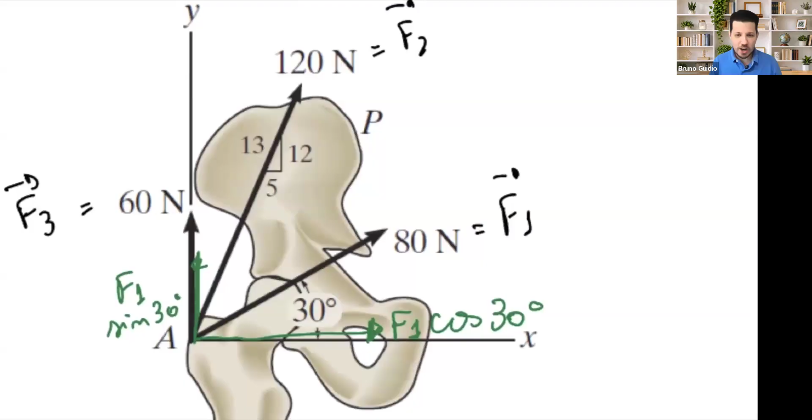With that, let's find the components of F1, F2, and F3. F1 is going to have a component right here, F1 cosine of 30, and another component, F1 sine of 30. I do expect you by now to know which is the sine and which is the cosine - this is the vector and this is the angle, between the vector and the x-axis. So this becomes the cosine, and this becomes the sine.

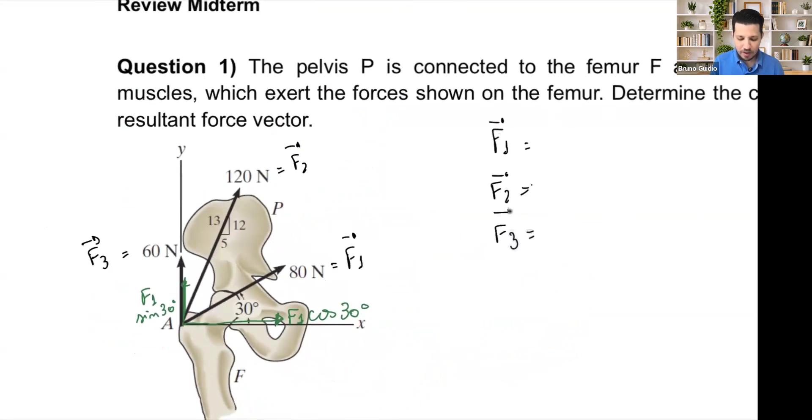What else do I need you to think about? Not for this problem, because I just put all of them as positive, but what is the direction of each vector? In this case, F1 is going to the right, so it's positive: F1 cosine 30 plus F1 sine of 30. And why plus sine of 30? Because it's going up. These are the kinds of things I want you to master.

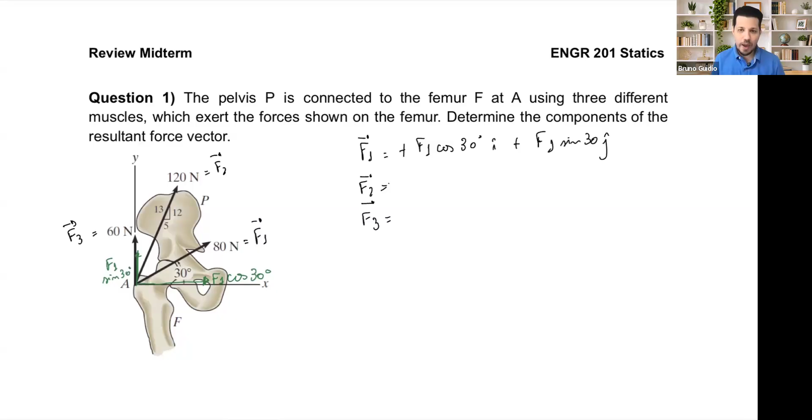Now we have this 120. Here we have two ways to solve the problem. One, we can get this triangle here, 13, 12, and 5. And we're going to find this pink angle right there.

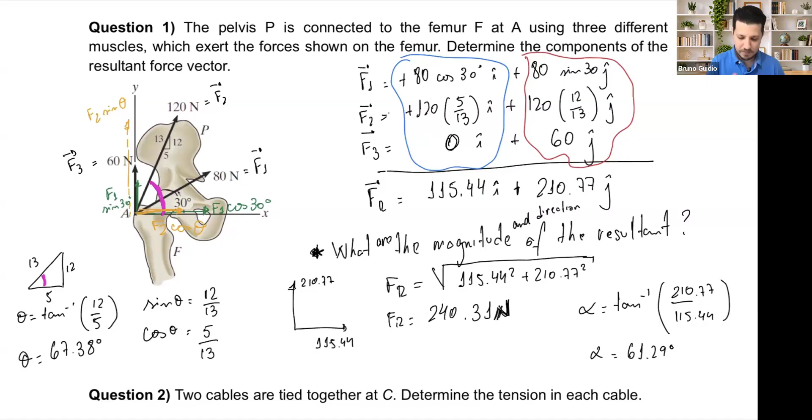Okay, going to the next problem. Question number 2 today for our review. This is an equilibrium problem of a particle. Particle equilibrium.

We have all the forces, in this case the tension in the cables, acting on the same point, and also the mass, the weight of this box.

So starting the problem, two cables are tied together at C. We need to find the tension in each cable. So pretty much what we have here, let's analyze.

Tension AC. Tension BC. What else do we have? Weight of this box. What else do we need to figure out?

Okay, my coordinates are here. What is the angle of each one of those tensions, those cables? What is the angle of each one of those cables?

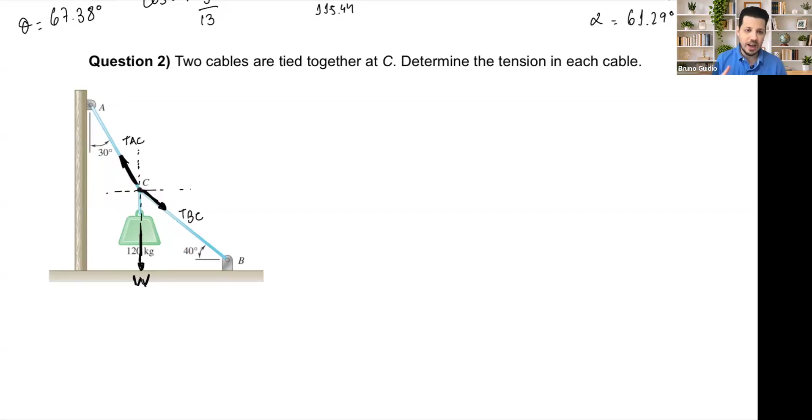I have the angles right here, 40, but what I need is the angle around here on my orange, so I know what is the direction. Let's use the trig rules, math rules that we know. For example, this is parallel, and this one also parallel.

Once I cut this, what angles are the same? See if you agree that this pink angle, 40 degrees, is going to be the same as this one, 40 degrees.

Once we cut, let's say this is 40, this is 40, this is 40, and this is 40 degrees. So my 40 degrees is right there. What about the 30 degrees? Let's say this orange force, same thing - if this is 30 degrees, this is 30 degrees.

Okay? Bruno, I don't want to think like that. Okay, let me give you another option.

Take a look at this triangle here. This is 90, this is 40. How much is this one? 50. It should be 40 plus this angle should be 90, plus 90 is 180. So this one is 50.

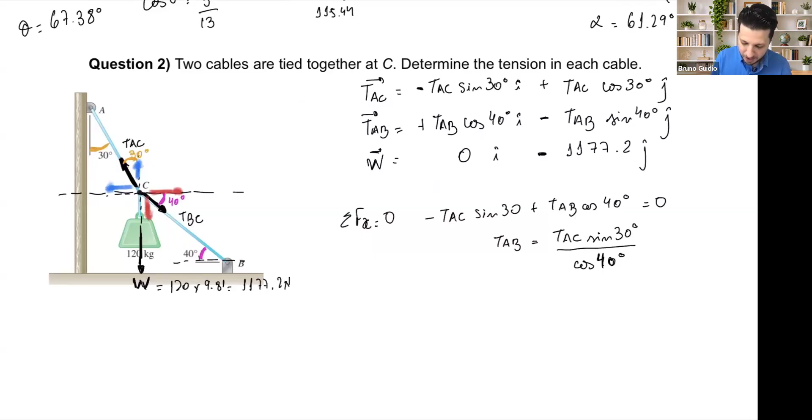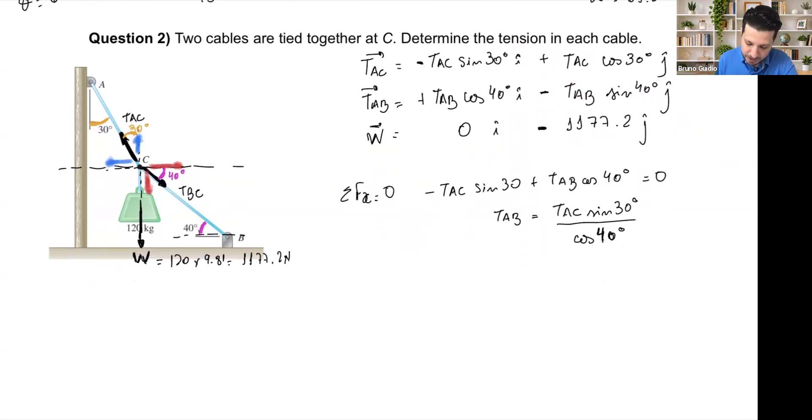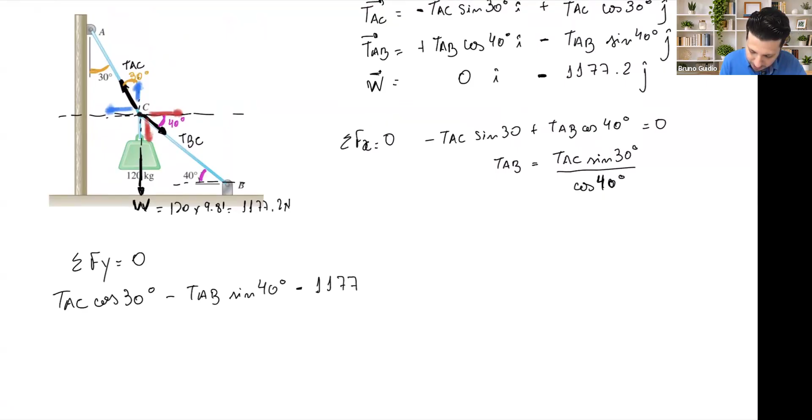Sum of the force in y. Let's do it, we have space so let me do it here. So I can also use this part. Sum of the force in y should be 0. So what I have in y is TAC cosine of 30, TAB sine of 40, and 1177.2. Okay, so this is what I have for y.

Now guys, I chose this specific problem and wrote it like this just to show you the following. Please, guys, where I have a lot of mistakes is right here on this step. I wrote TAB as a function of TAC. So TAC is still TAC cosine of 30. Now TAB will change as this one here.

However, please pay attention, TAB here, there is a negative, so I need to keep the negative. Parentheses, TAC sine 30, cosine 40, close parentheses, and then I need to bring the sine of 40, equal to 1177.2. Okay, so this step is where most of the mistakes happen.

Please pay attention, if it is negative, bring the negative. And always there is something here, okay? Bring it together, all right? This you can solve by many ways, okay? What I chose to solve here to show you is just solving one by one.

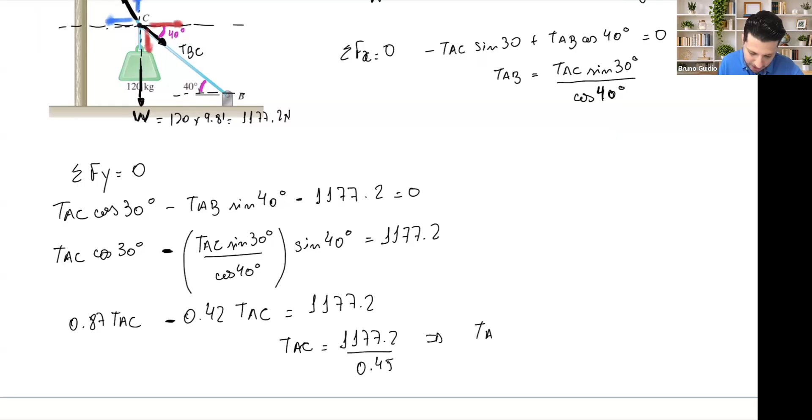In this case, I solve cosine of 30 is 0.87 TAC. Then what I'm gonna do is sine of 30 times sine of 40 divided by cosine of 40, and then negative, I should get 0.42 TAC. And then at the end, TAC is going to be that number divided by 0.45. I'll get TAC as 2,616 newtons.

Okay, and with that, of course, I'm gonna go back there. I'm gonna write TAB as this. Okay, and I hope I didn't make any mistakes.

So for this one, what I tried to do is solve individually and get the numbers just to show you that we can do like that. I think in class I put them together, cosine and then minus this one here, and solve it once, everything at once. Just to show you, you can do it like that.

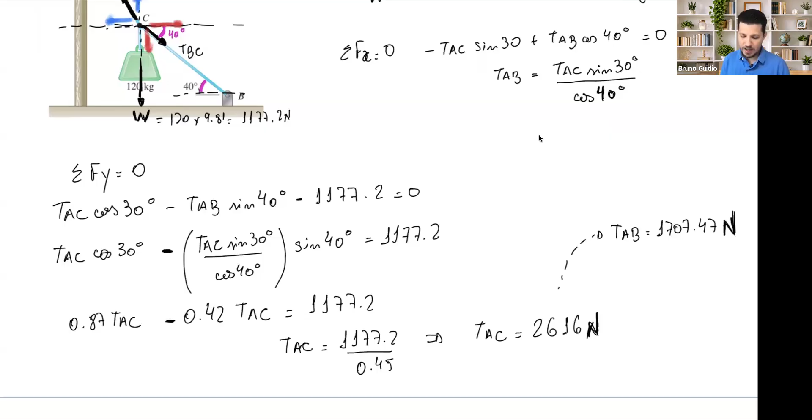Okay, let me check, 1177.2, 45. Yeah, that's it, it's correct. So this is question number 2, equilibrium in a particle. Any questions, guys? Any questions? It's all good for those who are here.

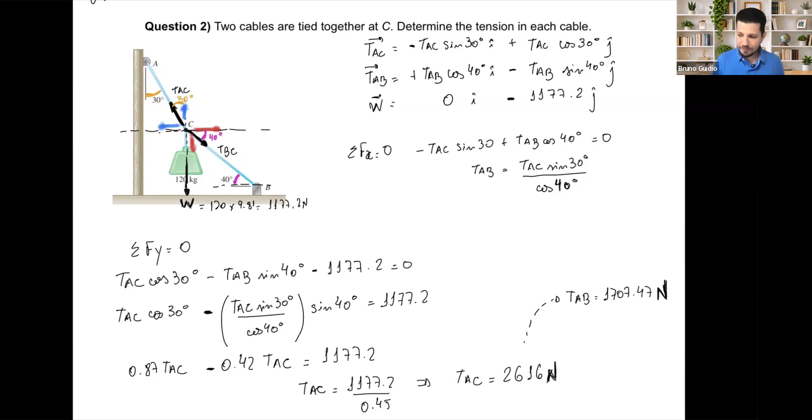Okay, going to third question. Third question. Simple one here, for this one, just for us to practice, find moment. Let's find a moment about A. And I don't know why we have this part here, so let me just delete. Let's consider like up to here. All right, so first thing that we need to do, components of that force.

Eighty cosine 25, sine 25, see if you agree. All right. Let's see what's going to cause moment. Sum of the moments, how much is it? Okay, so this is just to find the moment. I'm not saying moment should be 0, this is not equilibrium equation. I'm just saying find the moment.

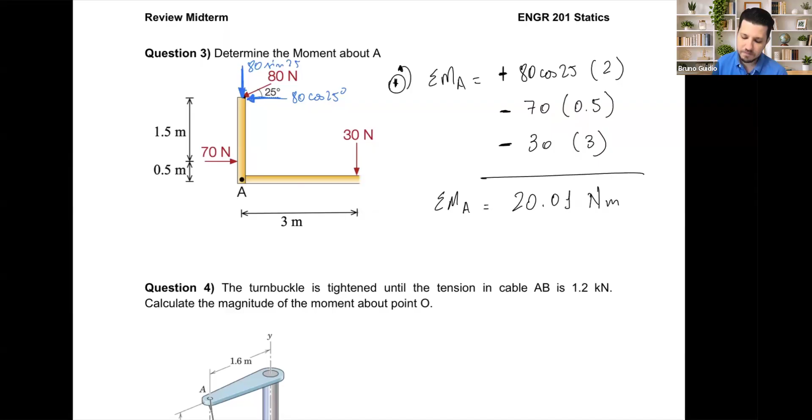So again, vectors, sum of the forces. Here we have 2D equilibrium of a particle, and then we introduce moment in 2 dimensions, and then here comes the moment in 3 dimensions.

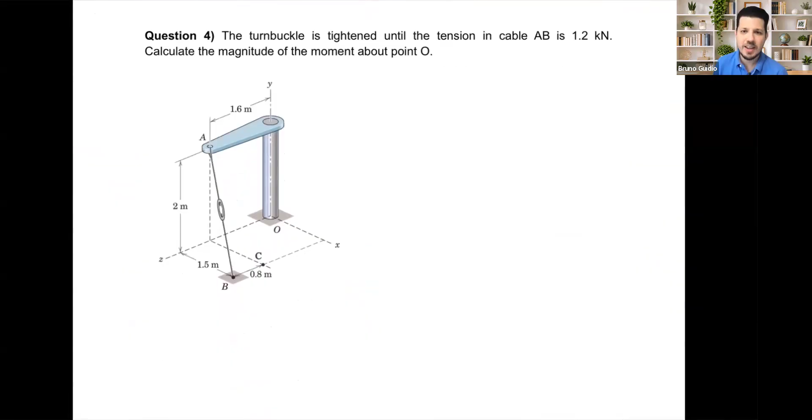So let's calculate the moment about point O for this case. We know the tension AB is 1.2, so we have the force AB. We know already the magnitude, but we don't know its direction.

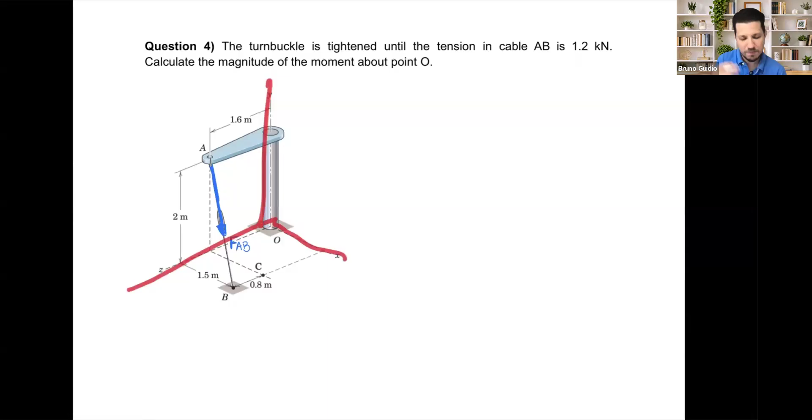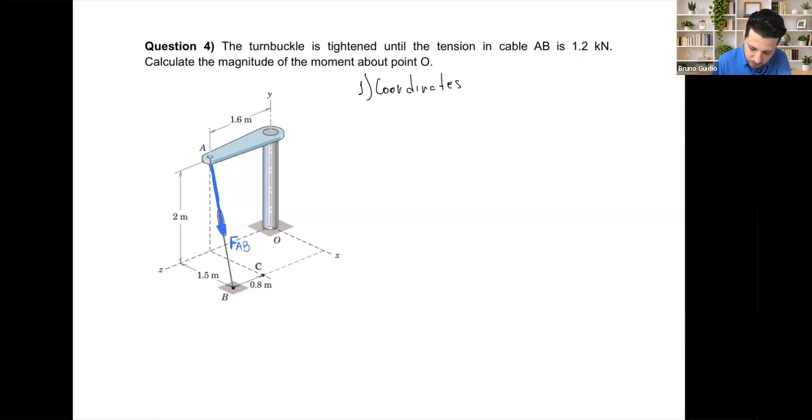First step, coordinates. Points that I may need. What points do I have here? O: 0, 0, 0. Point A: let me move this so I can write everything. AX is right here, so this is the same plane here, meaning A is 0 in X. In Y is up there, meaning 2 meters.

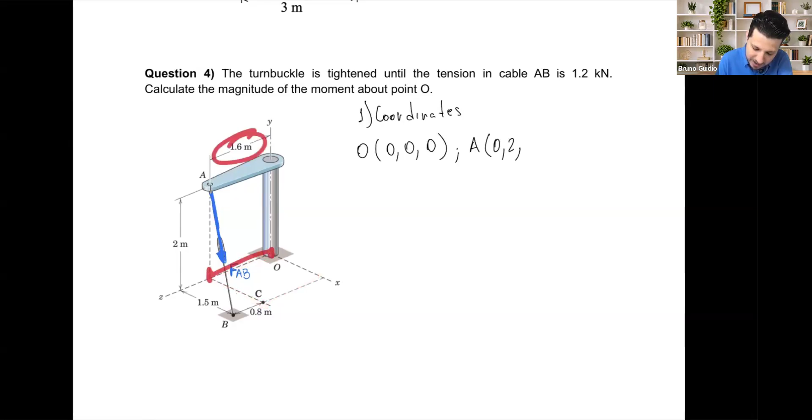And A: 0, 2, and now Z. Z is right here. This is the distance, and that distance is, oh, it's not here, it's over there, 1.6. What about B? That's the other one I'm going to use. O, B, and A, B. B and X, right here, all the way there. So this is 1.6 plus 0.8, which is 2.4.

Oh sorry, this is on Z. My bad, this is X here, this is up to here. My bad, I almost made a mistake. So this is the distance, 1.5. Already calculated Z, 2.4. So this up to here, that's the distance Z, and that's the distance X. Almost made that mistake here. And Y? Y is just on this plane, so 0.

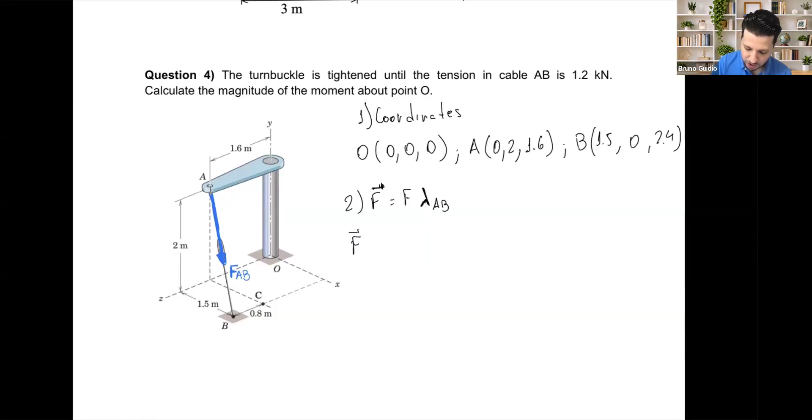Second step is the F vector. I know the magnitude and the lambda, that's going to give us the direction. So F vector is going to be 1.2 kilonewtons times lambda AB.

Lambda AB is B minus A. So B minus A is going to be 1.5 minus 0, 0 minus 2, then 2.4 minus 1.6. Square root of: I know this is going to be 1.5, plus negative 2, and this is going to be 0.8.

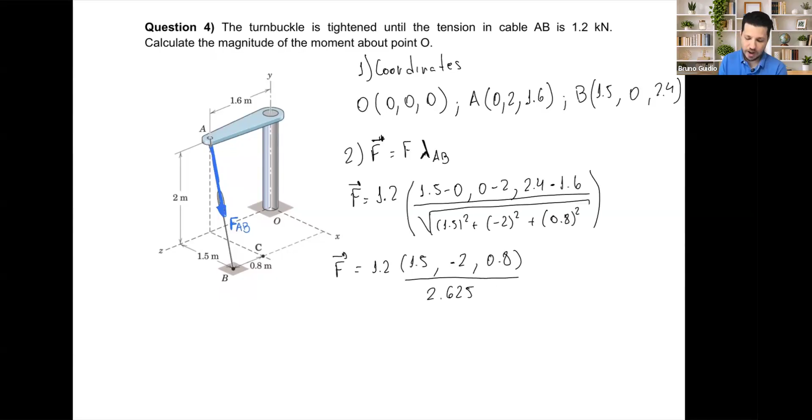Okay, so I can solve it. This F is going to be 1.2 times 1.5, negative 2, 0.8, divided by 2.625. That's what I have as my solution. Then I put here that this is going to be 0.69 I, negative 0.91 J, and positive 0.37 K. Right? Yes, so could increase it.

Third step, let me go to this side, is to find the R vector, position vector. Once again, position vector should be from the point to any point on the line of action of the force. Meaning I could go OA, OB. Those 2 points I know. I don't need to go in the middle of this cable.

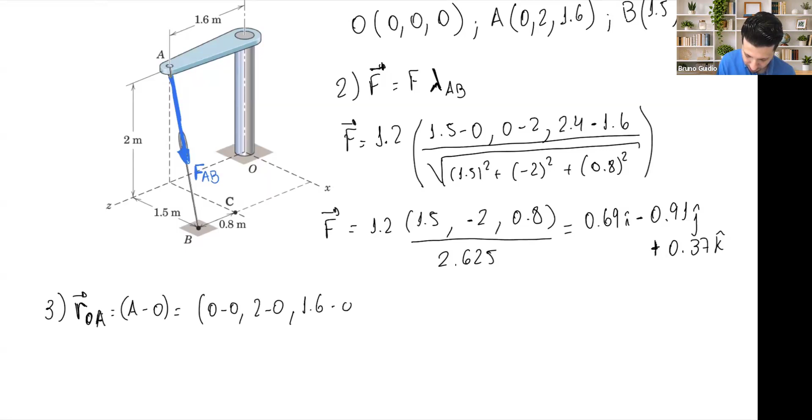I could go OA, OB. Which one should you choose? Any of those, all good, just show me what you're choosing. For example, here, OA, meaning A minus O. This is going to be 0 minus 0, 2 minus 0, 1.6 minus 0, so this is going to be 0I plus 2J plus 1.6K.

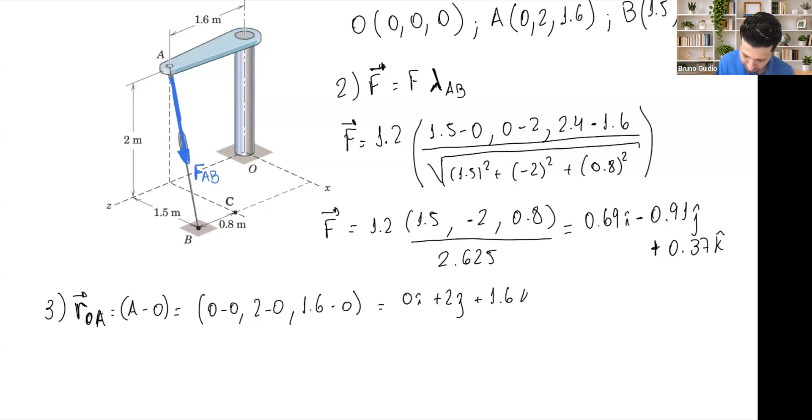Then you do this determinant by doing what I told you, like this, or hiding this one and doing like this, hiding this one doing like this, then hiding this one doing like that. Just remember, if you do like this, when you do the J, it should be negative, and then you open parentheses: this one minus that one.

Go here step by step, I'll let you try to do it and find the solution. When you study, this is my solution: positive 2.196, positive 1.104, and negative 1.38. And this is my solution.

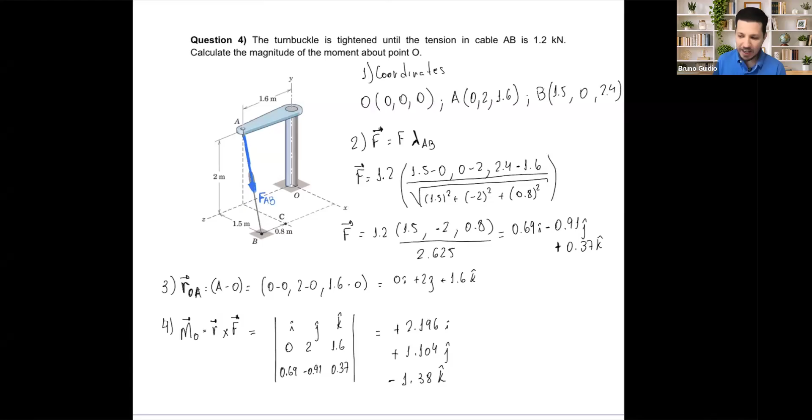Okay, all right, we are good. We're gonna get it done.

All right, this one is a nice problem just for us to practice a few things. This is regarding equivalent force, force and couple system. A little bit different from what we did.

It is good for you to do a lot of sum of the force in X, sum of the force in Y, sum of the moments. I want you to find, okay, those are the same beam, 5 meters, and I have 6 scenarios here. The only thing is you have to find 2 that match, meaning those 2 systems are going to be force and couple equivalent. Let's sum the force in X and Y, and sum the moments for each one of those 6, and then let's compare. If the X, Y, and the moments are the same, they are equivalent. But what is behind this problem is just for you to practice doing sum the force in X, sum the force in Y, and calculate moments. That's the main point for this question.

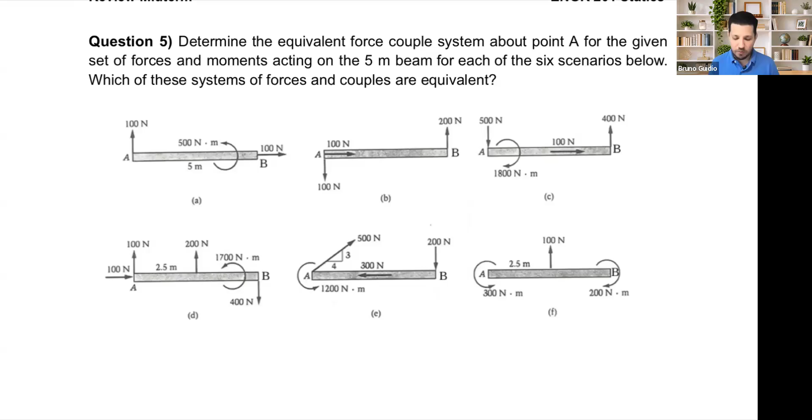With that in mind, let me do it with you guys. Let me see, we'll do all of them here.

Sum the force in Y. What do I have? Positive 100. And then what about sum of the moments?

But moments where? Well, now I have to pick. If they are the same beam, same 5 meters, I'll take the moment at the same point in every single beam, in every single scenario. For example, let's take the moment about A, so we're gonna compare the moment about A in every single one. If that decision is made, it's made.

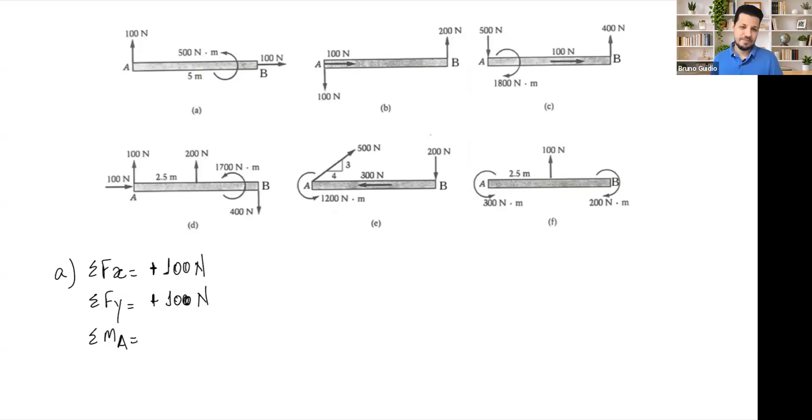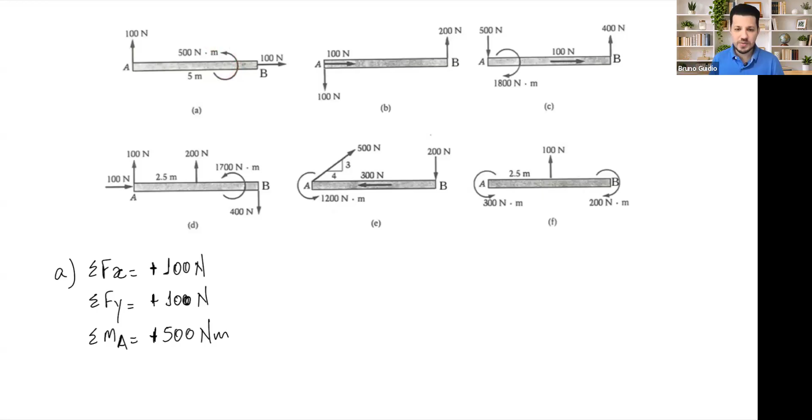So sum of the moments about A. Now let's see, is 100 doing moment about A? No. Is this 100 doing moment about A? No. What is doing moment about A? Well, the 500, that is already a moment. It's already a moment, so do we have a distance? No. So this is positive 500 Newton meters. And why is 500 positive? Because this is counterclockwise. All good for this first question?

Okay, scenario B. Sum of the force in X should be plus 100, that's it. Sum of the force in Y: I have negative 100, positive 200. Well, this one I have positive 100 newtons. Positive 100 newtons.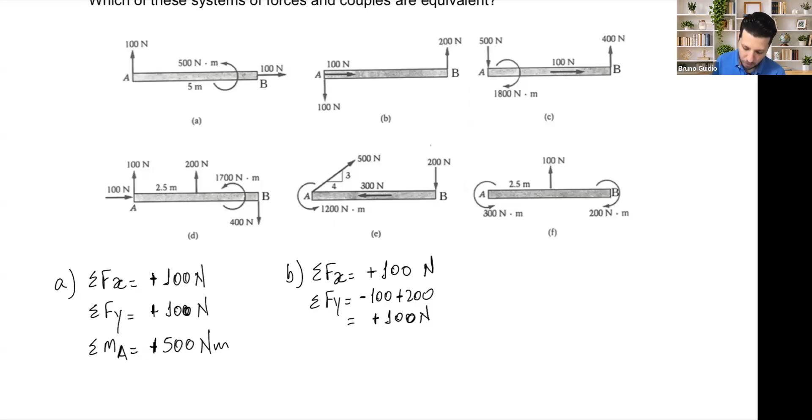But what about moment? Moment about A. What do I have for moment? Is 100 Newton here doing moment about A? No. What about this? No. What about the 200? Yes. 200 times 5 meters, this is the same 5 meters. So 200 times 5 meters. Positive or negative? Well, positive, counterclockwise. So at the end, I have 1,000 Newton meters. That's my moment, 1,000 Newton meters.

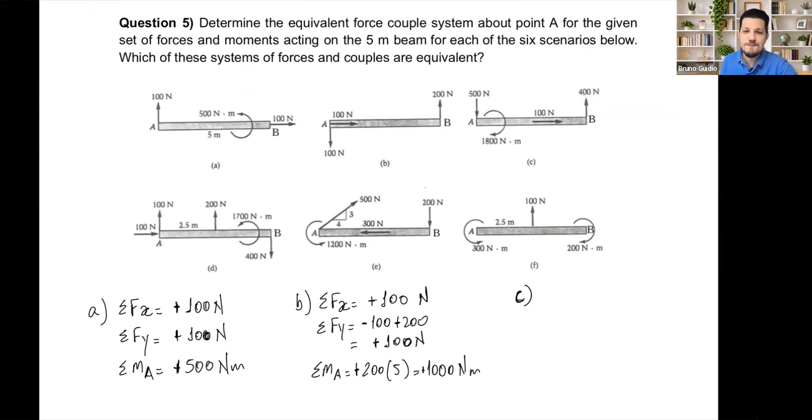C. Let me decrease this a little bit, just because I don't know where my face is around here. I'll figure it out once the class is done and I see the recording. C. What I have in C is sum of the force in X is 100 positive.

Sum of the force in Y: negative 500, positive 400, negative 100 newtons. Now it's negative 100 newtons. What about the moment about A?

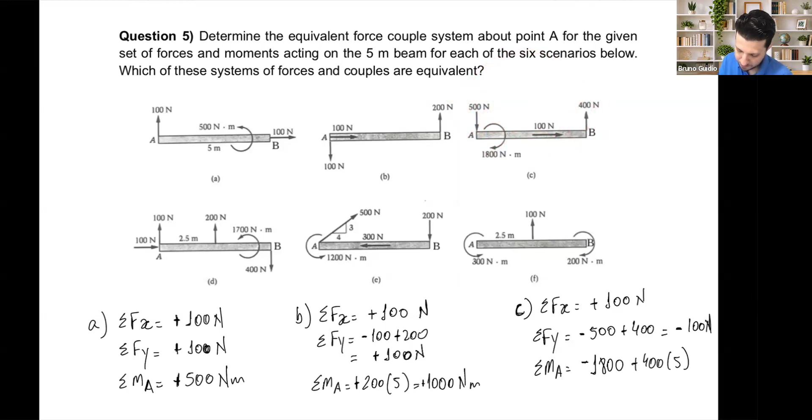Moment about A. 500 newtons? No. 1800? Yes, clockwise, negative. So this is negative 1800. 100? No. 400? Yes, positive times 5, this is going to be 2000. 2000 minus 1800, positive 200 Newton meters. So far, so good?

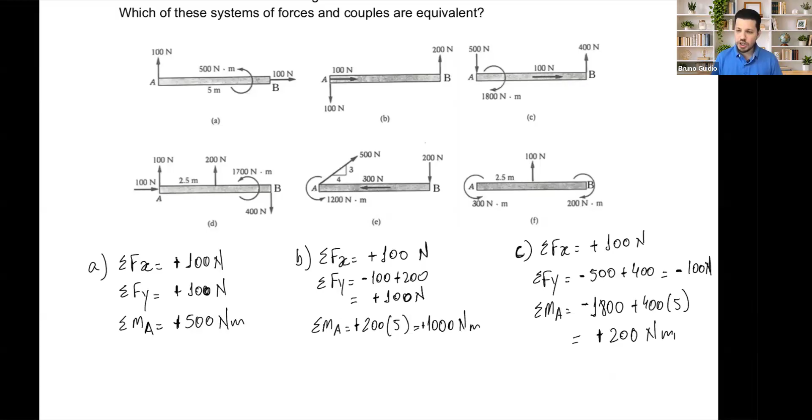D? Sum the force in X: positive 100, that's it. Sum the force in Y: negative 100, sorry, positive 100, start from here, positive 200, and negative 400. This is negative 100 newtons.

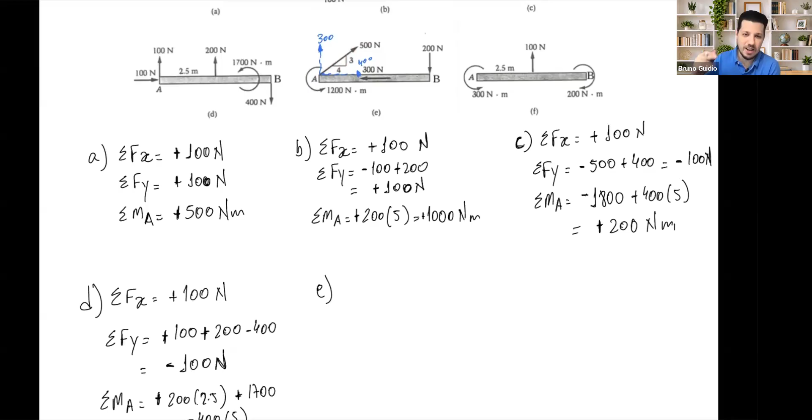This one, once again, you can save some time. If this is a 3, 4, 5 triangle, and this is 500, well in this case this one here is 300, this one 400. So we keep the 3, 4, and 3, 4, 5, but in the hundreds - 300, 400, 500, same ratio.

So E here is going to be the following. Sum the force in X should be, not 0, but should be how much? I have positive 400 going to the right and negative 300 going to the left. That's it, so I have positive 100. Sum the force in Y should be positive 300 and negative 200, so I have positive 100.

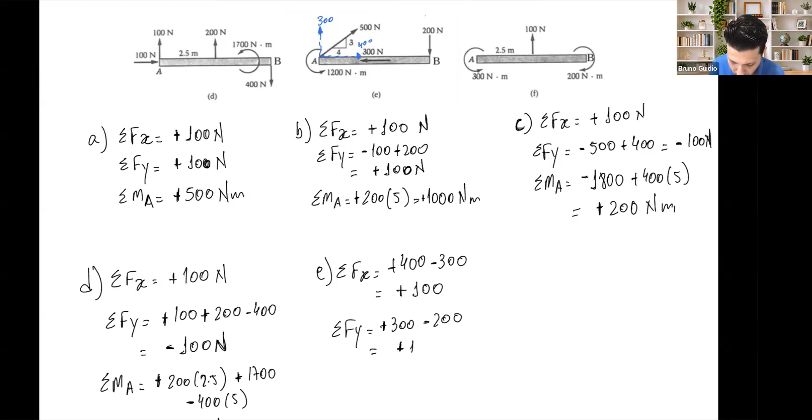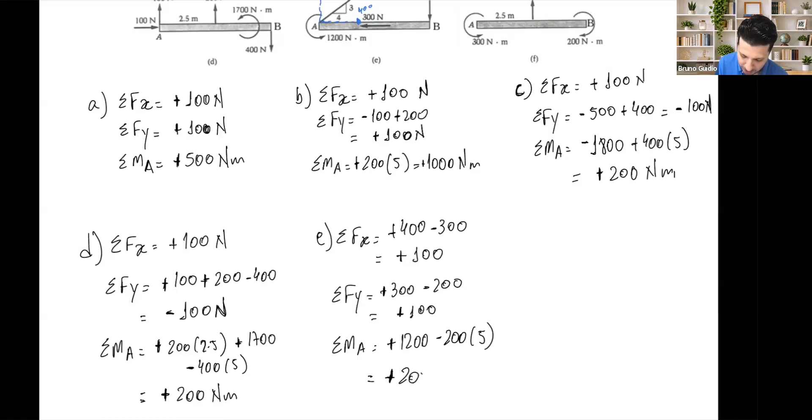Moment, sum the moments about A, okay? 300 no, this 400 no, these other 300 no, okay, no, no, no. Of course it's no, all of them no. 1200 counterclockwise, so positive, and then negative 200 times 5. This is going to be 1,000, then it's going to be positive 200 Newton meters.

And the last one, F, sum the force in X. This one, I don't have any X, so 0. Sum the force in Y, positive 100. And sum of the moments about A is counterclockwise 300, positive.

Counterclockwise 100 times 2.5, and clockwise negative 200. Okay, at the end this is going to be 2.5, 250, 550, 350 Newton meters.

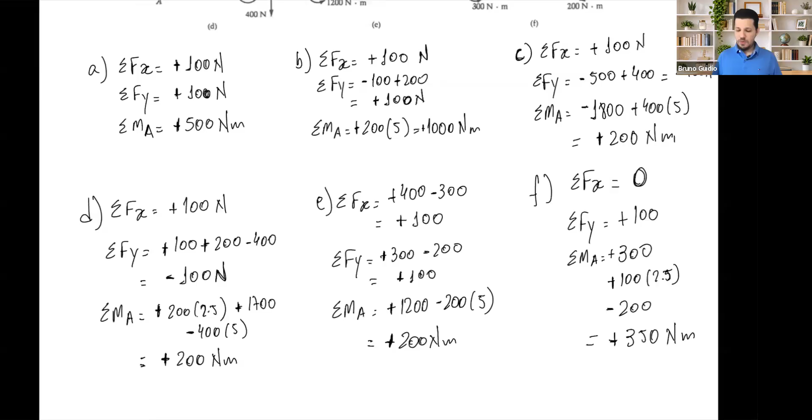Okay, a lot of them. So what we need to do is just compare 100, 100, 500. I don't have any 500 here. I know I have a lot of 100. This is not 1,000 as well, I don't have any 1,000. 200, I have this one, this one, this one, so those three. And then 350, I don't have any.

Comparing X: 100, 100, 100, all good. And comparing Y: negative, negative, positive, this goes away. Okay, my solution would be C and D, they are the equivalent systems, they are equivalent.

Okay, so a lot of repetition, but just for you to get practice on moments, especially moments.

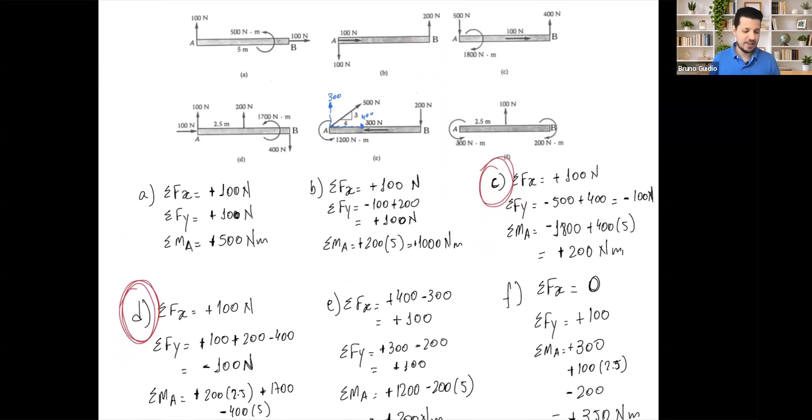What time is it? Okay. Any questions, guys? Any questions? Any questions? No?

All right, now we go to our last topic. Our last topic is the equilibrium on rigid body, two dimensions, okay? Equilibrium on rigid bodies.

And because this is just what we covered this week, I brought 3 problems, okay, just for us to practice more and more, and to help you on the homework. And to tell you the truth, I think this equilibrium rigid body is the most important topic so far, because it puts everything together.

So as I've covered up to now, we have 6 topics. Probably I'll merge a few of them or choose 4 topics for 4 questions on your exam. But if I have to tell you one thing for sure, equilibrium in a rigid body is going to be there. So 6, 7, and 8 here are the questions - something related to them is going to be on the test, meaning what we are covering this week. Sounds good?

Any questions? No? So let's start. Question number 6: calculate force and moment reactions at the bolted base O.

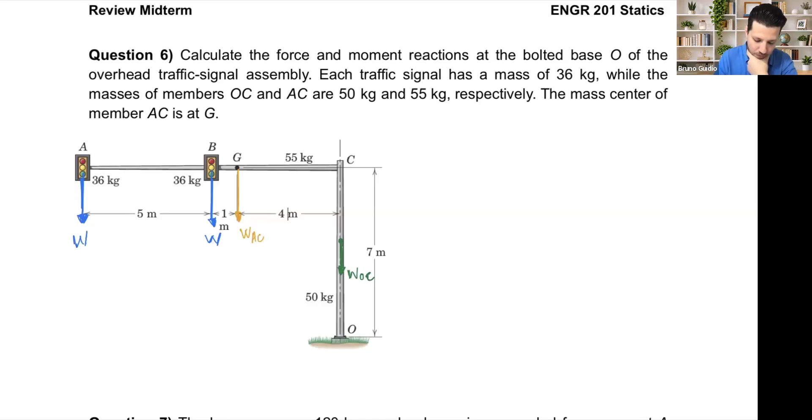Because of space, I'm not going to draw the free body diagram, just draw it all here. Don't forget, kilograms is not a vector, mass is not a vector. What is going to be the vector is what we need, the weight.

Okay, the weight. This is my calculation: 36 times 9.81 gives 353.16 newtons. Same for this second one, I'm not going to write it but it's the same. AC is 55 times 9.81, which is 539.55. And for this one, 50 times 9.81, which is 490.5 newtons.

And then, already mentioned, OY, OX, MO. Okay, all good?

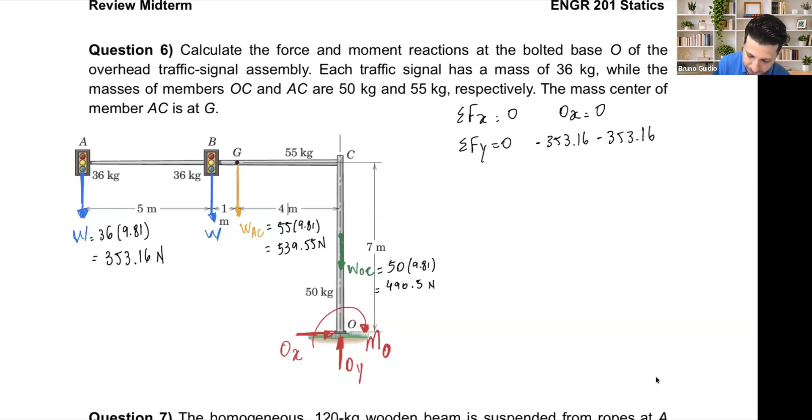Sum of the force in Y: negative 353.16, don't forget it's twice, so negative 353.16, negative 539.55, negative 490.5, positive OY equals 0. So OY is going to be all of these added together. I don't have this answer in my notes, so let me calculate: this times 2, then plus 539.55 plus 490.5. So this is 1,736.37 newtons.

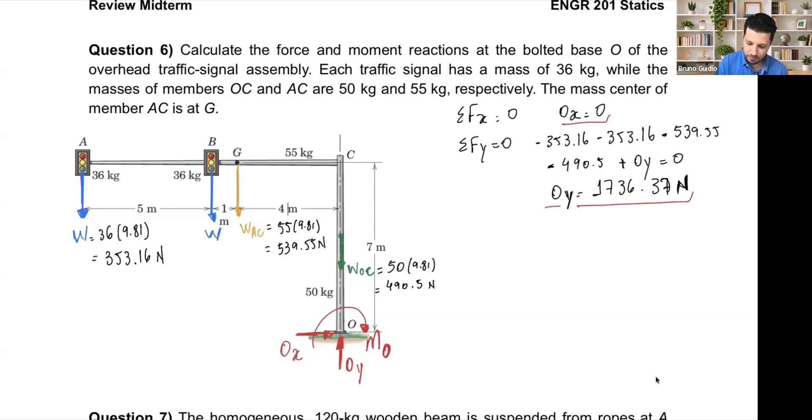Sum of the force in Z equal to 0 - oh wait, Z, what am I thinking, this isn't 3D anymore. Sum of the moments about O. So what I have for moments about O, let's pay attention now.

Is W doing any moment about O? This first W, it is. What is the perpendicular distance from the line of action to that point? You agree that this is 5 plus 1 plus 4, so 10. So I have 353.16 times 10. Positive or negative? Positive, counterclockwise. So if that is positive, this also is going to be positive, but the distance now is 5, so 353.16 times 5.

What about WAC? WAC is also positive, but the distance is 4, so positive 539.55 times 4. What about WOC? No, WOC - the weight here is passing through O, so I don't have a moment for WOC. This is passing through O, the line of action is on top of O.

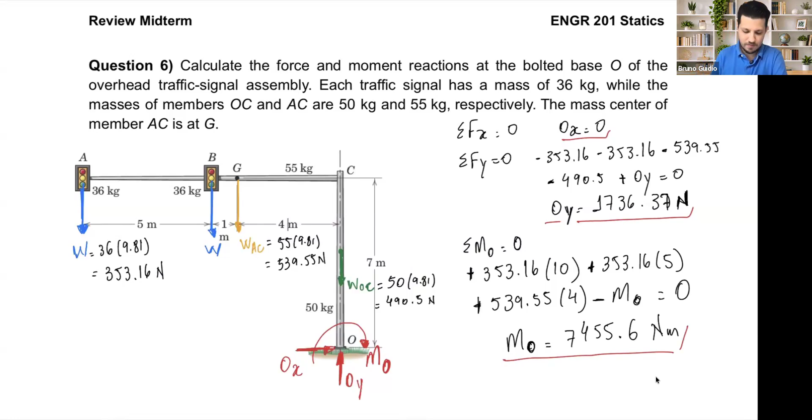Okay, let's keep going with all of these. Another question here for equilibrium.

The homogeneous 120 kilogram wooden beam that's suspended from ropes at A and B - a power wrench applies a 500 Newton meter clockwise couple to tighten a bolt. Determine the tension in the ropes.

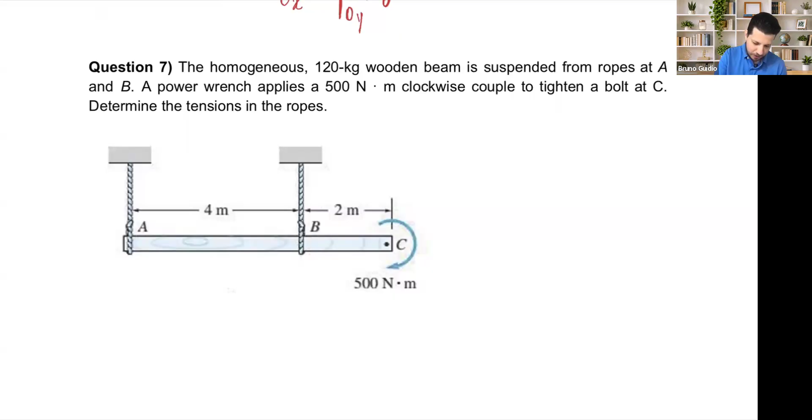Okay, similar one, chose this one just to show you about the couple moment we have here. Right here I have tension A, right here we have tension B. Keep in mind, always read the statement, even though it's not showing anything here. What is it saying? 120 kilogram wooden beam - guys, if the problem gives you the mass, you have to consider the weight. If it didn't mention anything, then you just start the problem right away. However, here we have the weight, and where is it going to be?

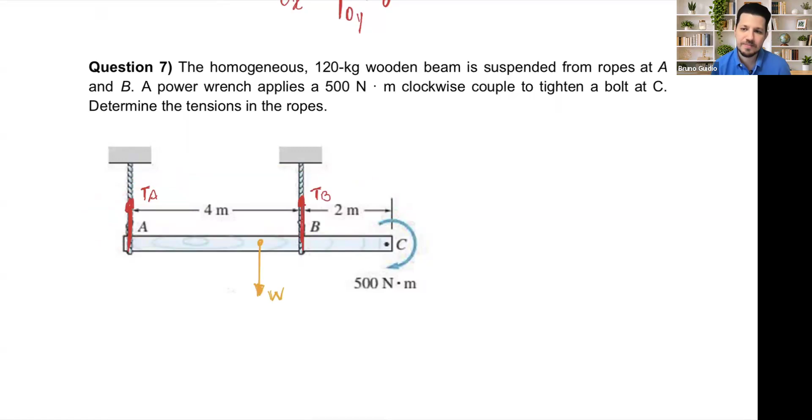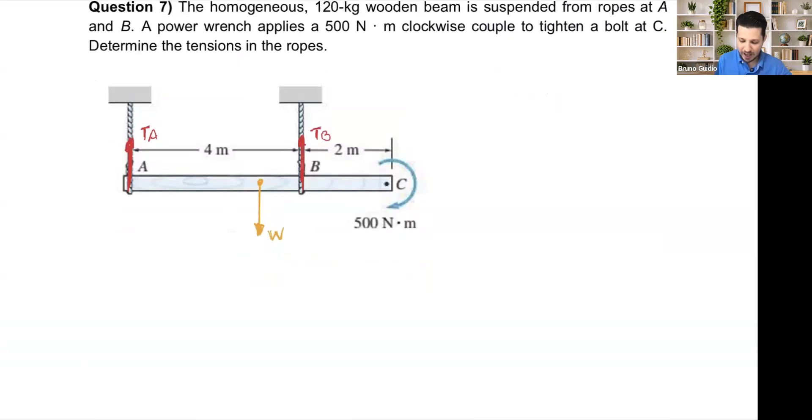If this is 4 plus 2, 6, the weight should be right in the middle, at the center of this beam. So please pay attention on it. Let me, since this is straightforward and I have some space, draw the free body diagram here.

Free body diagram right here just for you to visualize. Right here I have TA, right there I have TB, and right here somewhere I have W, which is 120 times 9.81.

I'm going to calculate the moment, and right here I have the couple, which is 500 Newton meters. All of this is 4 meters, this is 2 meters, and this is 3 meters. This 120... I think it was already mentioned, gives 1177.2 newtons. Now I can solve the problem.

This I didn't mention anything in X, because those cables just let the beam move - the cables are just putting a Y reaction there, but I don't have anything in X, so I don't need to start in X.

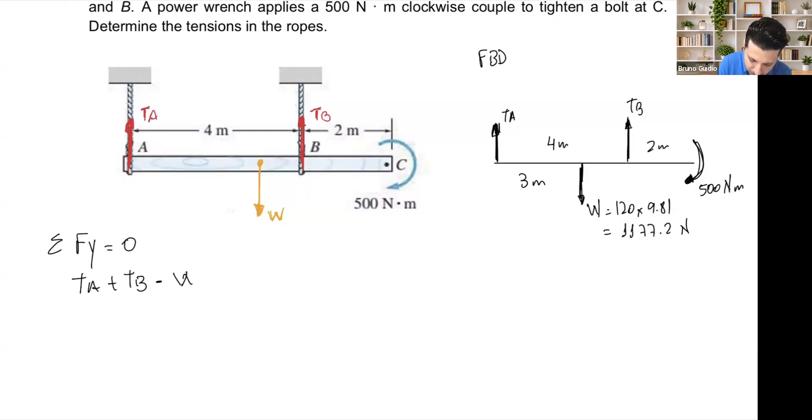I'll start in Y. Sum of the force in Y should be 0. So what we have is TA going up plus TB going up minus W going down. So I know that TA plus TB should be 1177.2.

And then what I'm going to do is take the moment about A. Weight times 3, that's the distance, negative, so negative 1177.2 times 3. TB is going to be positive counterclockwise times 4, TB times 4. And then 500, which is already clockwise and already a moment, so it's already negative, negative 500. No distance because it's already a moment.

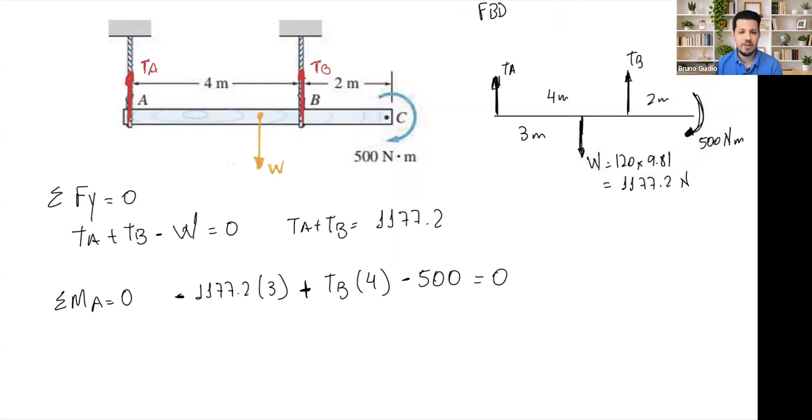By doing that, it'll let you figure out the calculation. Got 1007.9. Then for TA, 169.3 newtons.

Any questions, guys? If not, let's go to the last problem.

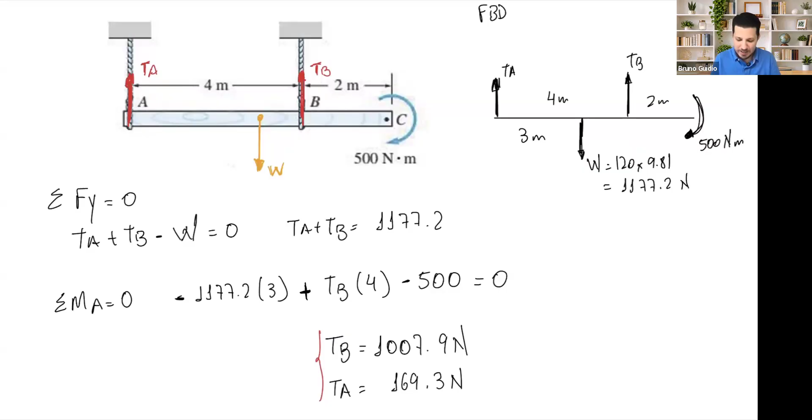This problem is really like this one. A few things for you to think about. All right, last problem here for our review. And then I will stop recording after this problem, number 8.

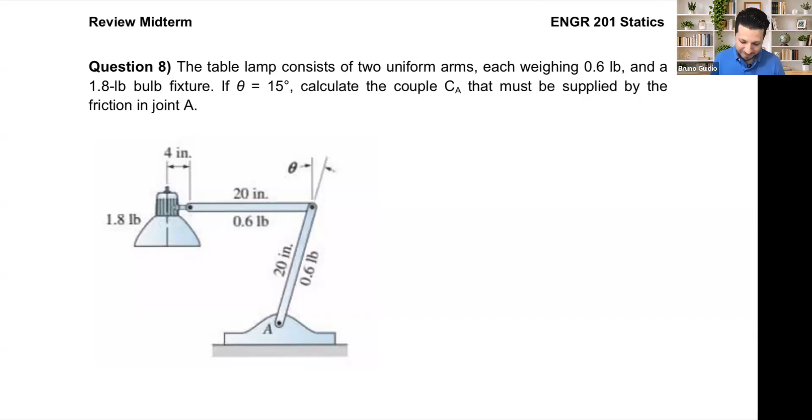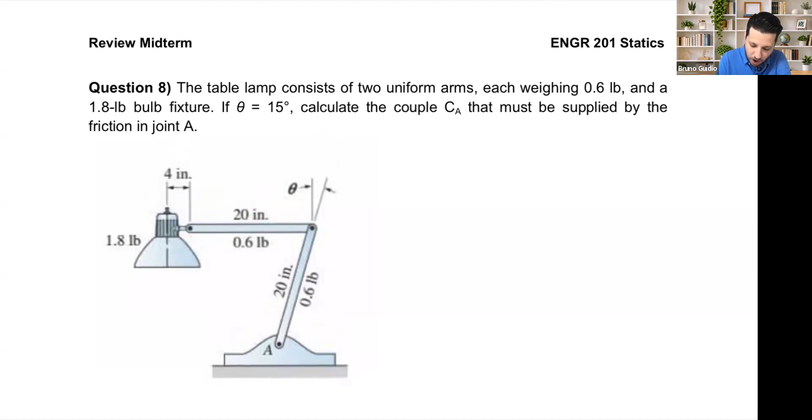So let's go for this last problem, let's see what's going on here. I really like this problem because it has a few different things from what we're used to doing. The table lamp consists of 2 uniform arms, each weighing 0.6 pounds. So this is the first information: 2 arms, each one 0.6 pounds, and they are the same, 20 inches, 20 inches. Keep this information, they have weight. And I already give the weight of this bulb fixture, so it's going to be 1.8.

It's saying the following: if this arm here is inclined 15 degrees, calculate the couple CA that must be applied by friction in joint A. So what is it saying? We have this system, we have the weight, we're going to calculate the weight of this object. But as you can see here, this is a pin connection. I don't have my table lamp here, but you can rotate it, right? You can rotate it.

So this pin connection is just giving you AY, and I can write here AX. That's truly a pin connection. And it's asking you to find what should be the couple CA that must be supplied by the friction. So you already have a lamp like this, you rotate it and it's going to stop. Why is it stopping? Why does it freeze in that position? Because we have friction, and that friction will restrict the rotation, will not allow this to rotate.

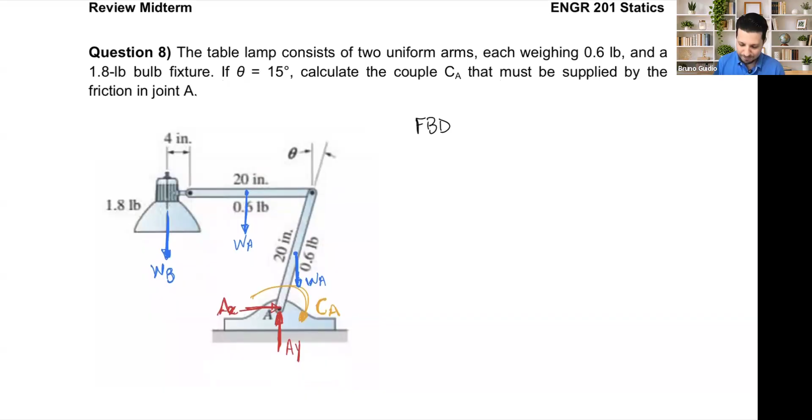All right, so let me show the free body diagram. Let's figure out a few things here before we start calculating. Let's take a look. Right here, so I have 4 inches, let's see how I'll do it. 4 inches of the bulb, and then I have 20 inches, say up to here, something like that. So right here is my bulb, and then I have the 20 inches.

Okay, so here I have 4 inches. Let me put it like this, save some space, 4 inches. And this 4 inches I have right here, WB, that was already given. How much WB? 1.8. So let me put the numbers here, pounds.

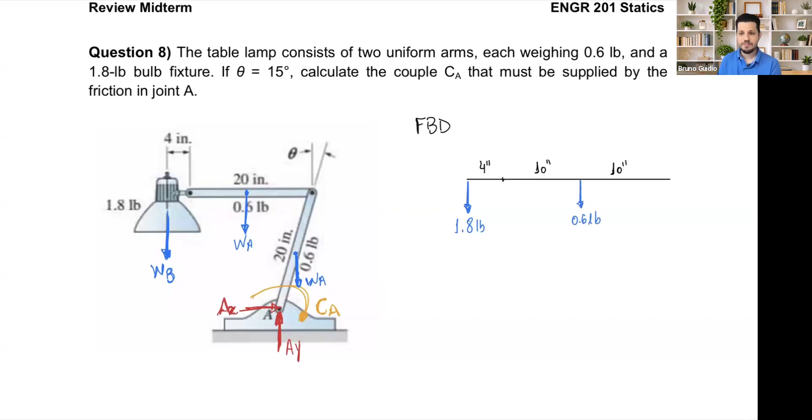Okay. Right here, let me put out right here once again. We have AY, we have AX, and also that's what we want to find, the CA. And let me just change here, arm, to not get confused with point A.

Okay, and then we have right here in the middle, somewhere here, we have this 0.6 pounds, 0.6 pounds. And I think that's it, okay, the forces are there. Okay, and if you agree, if this is at a half, this is 10 inches, this is also 10 inches.

Okay, the inclined distance. Now guys, this right here is 15 degrees. So you agree that this angle here, theta, is going to be the same as this angle here. Okay, so let me delete this one here, this 10, and put this, exactly the same thing. The 10 inches, 15 degrees. So let's start trying to solve it.

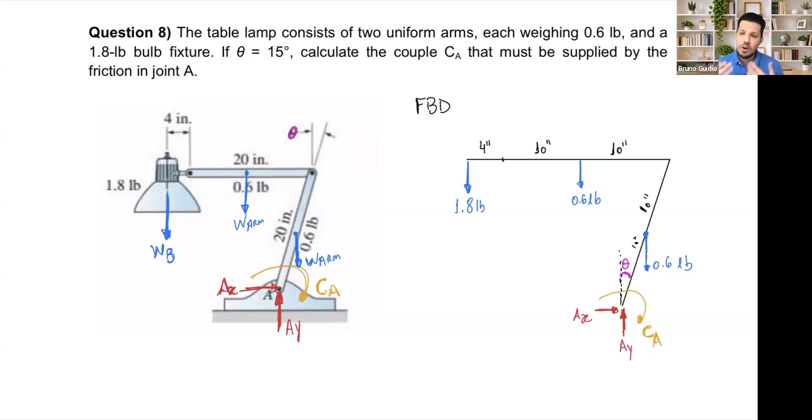And then we're going to figure out a few things. Okay, if we stop here right now and start solving, sum of the forces in x should be 0. Well, AX should be 0.

Sum of the forces in y should be 0. Then 1.8 negative, negative 0.6, negative 0.6, positive AY should be 0. So what we have, AY equal to, how much is it? 1.8 plus 0.6... 1.2... 3 pounds.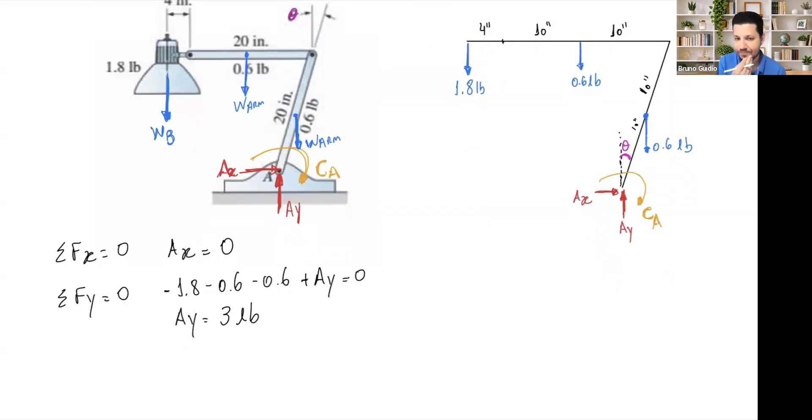Now let's go for the moment. Let's figure out the moments before we jump there and do something else. Moment about A. What do we have about A? Now pay attention, guys, pay attention. Is 1.8 doing moment about A? Yes, okay, yes.

Line of action is not passing through the point. But then what is this distance to point A? What is the distance from 1.8 to point A? Even though I couldn't hear you, someone watching this live answered me 24, which is not okay, which is not 24, because 24 is the distance from here to that point. But the point A is in this point here, this direction?

No, point A is right here, it's right here, take a look. Somewhere here, that's the distance. How much is that distance? I don't know. What should I do? You should find it, you should find that distance.

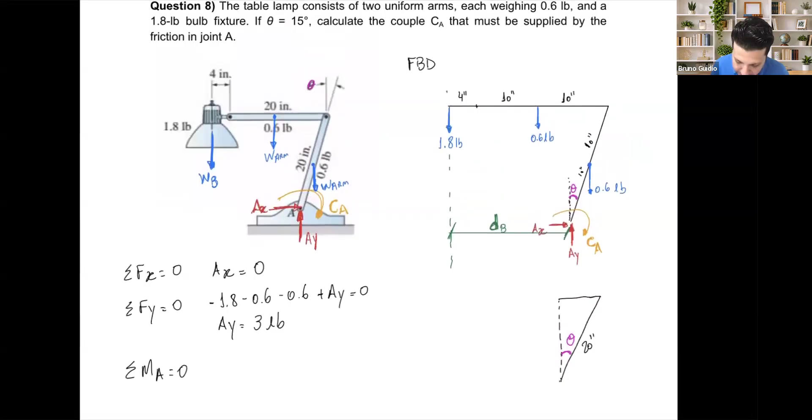20 inches. I have the angle 15 degrees. So if I want to find what is this, let's call it x. Sine, cosine, tangent, SOHCAHTOA.

SOHCAHTOA. Sine is opposite over hypotenuse. Sine of angle, opposite. Well, I have the hypotenuse. So x is going to be 20 sine of 15 degrees, which is 5.18 inches.

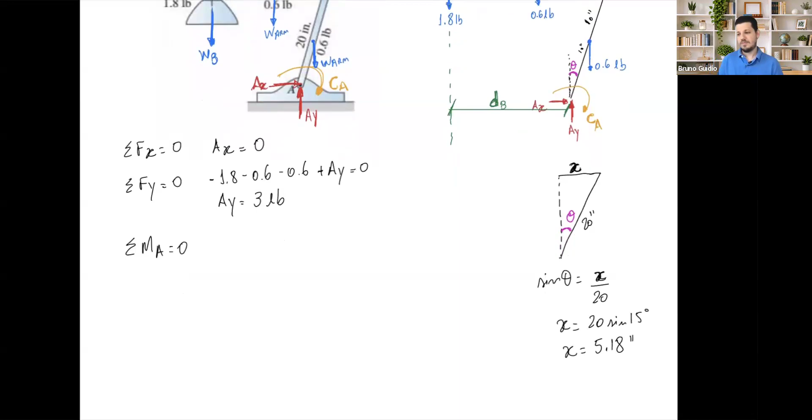5.18. So now I know that this one here - which color haven't I used yet? Well, I've used a lot of colors already, so let me use blue again. I know that this distance here, up here, from this one to here, this distance is 5.18 inches.

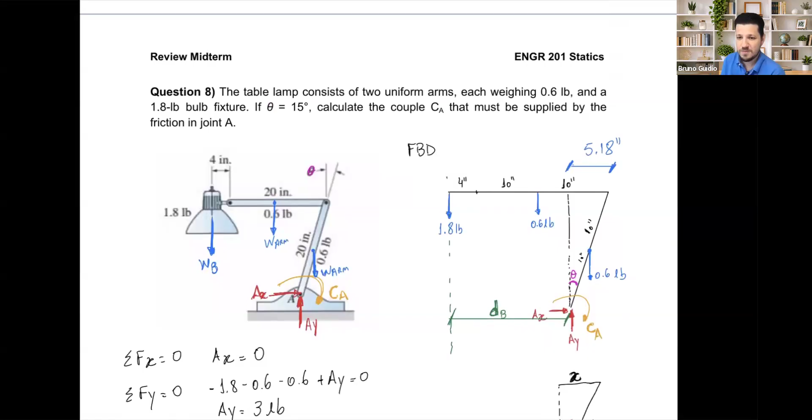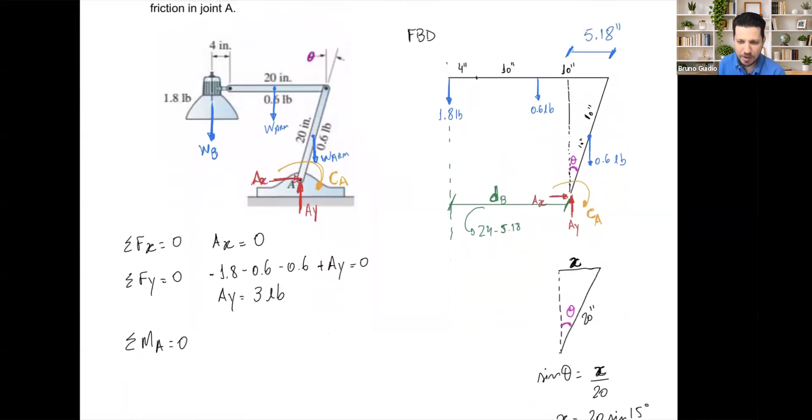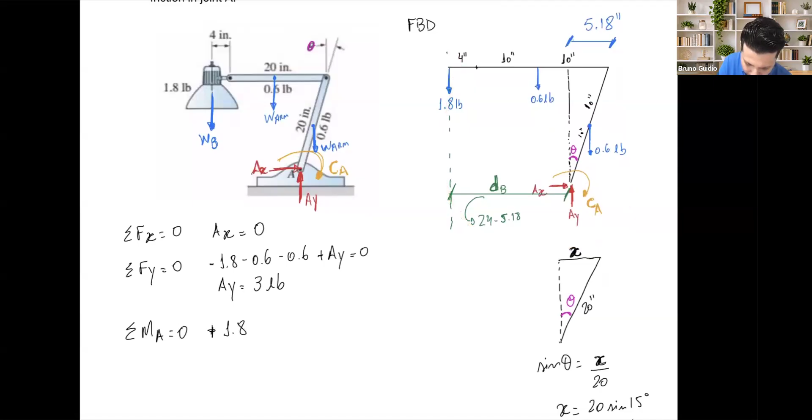And how much is going to be dB? Well, dB in this case is going to be 24 minus 5.18. Can we write this in the moment equation just to keep organized? This is going to be counterclockwise, so it's positive 1.8 times, put it here, 24 minus 5.18, and put it there just to keep organized so you can see.

Then we have positive 0.6, and the distance is not 10, it's 10 minus 5.18. Of course, you can do this calculation outside and come here, just put 18.82. That's the answer here, 18.82. Just putting it here for you to visualize what we are doing. So we have those two.

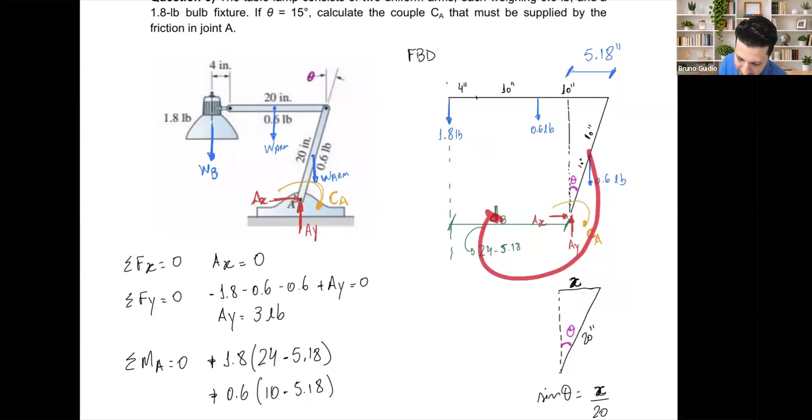Now my question for you, the next one, the 0.6 guys - use your math knowledge. How is the distance, how much is the distance? First of all, it is clockwise, so it's negative 0.6 times something. What is this something? Bruno says it's 5.18 - no, it is not. 5.18 is right here, and my 0.6 is right there, so it's this distance here. How much should this distance be?

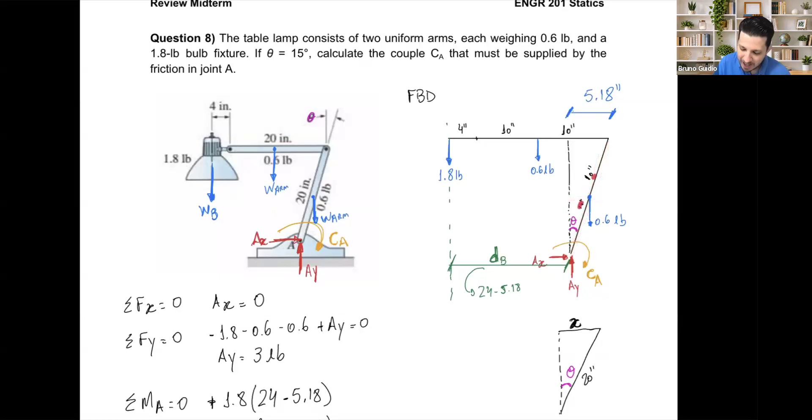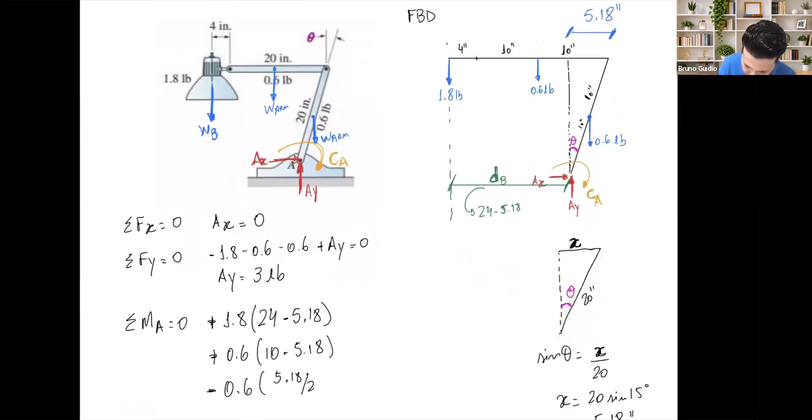Where does it apply? This applies at the center of these 20 inches, so that's why we split 10 and 10. Well, similar triangles - if this is 20 and this is 5.18, how much is this going to be if this is 10? Half of it, guys. 5.18 divided by 2.

And then lastly, negative CA in my case here. And all of this should be equal to 0.

Okay, so CA, let me do this calculation for you. CA is going to be 24 minus 5.18, plus times 1.8, 33.876, plus 10 minus 5.18 times 0.6, 2.892. And the next one is negative 5.18 divided by 2 times 0.6, 1.554. CA is 33.876 plus 2.892 minus this one there, equals 35.214, pounds-inch.

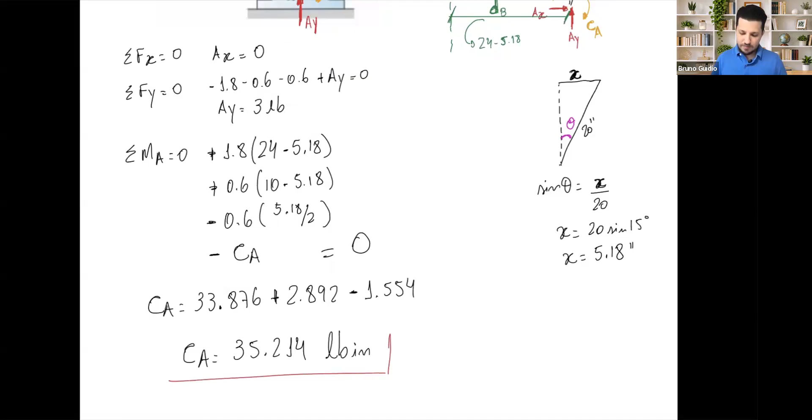And that's my answer. That's how much should be the moment applied by the friction, supplied by the friction. Any questions? All good?